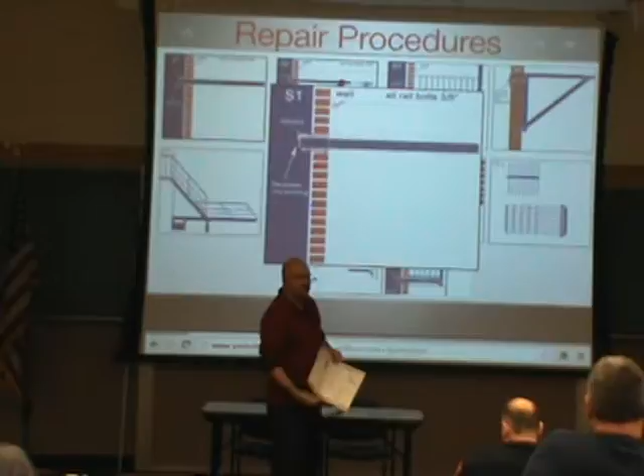every fire escape has been built this way. We're gonna end up on cantilevers and ladders. When you start looking on the inside, this is how every fire escape has been built for 100+ years. None of them are built any different than this, okay? So let's take a look at this. All steel that goes into a building only goes in 8 to 12 inches deep, guys, that's it. It doesn't go 2 feet deep in your building, 8 to 12 inches deep.

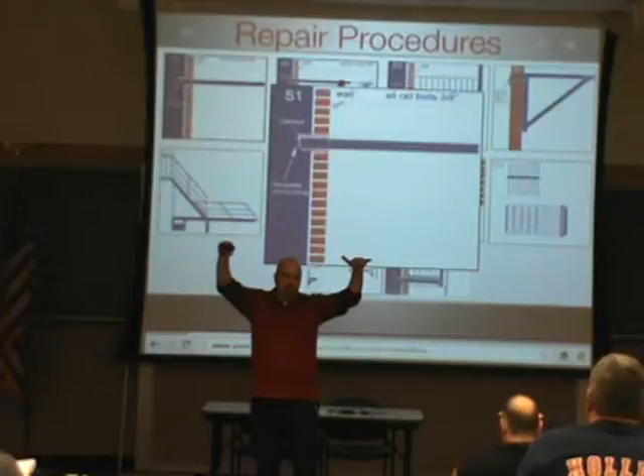So if you put a lot of pressure on this that doesn't have a brace, what's gonna happen in this area? You put all the pressure there, right? It's simple physics, it'll blow out that cement, right? So when you lose a bracket or you lose a leg to the ground, what happens to that structure that's still up in the air? You load it incorrectly, that's when it falls. Otherwise, it'll support itself. But you put people and elephants on there, what happens? Okay? So this is how every fire escape support starts. They opened a hole in the wall in 1910, they stuck this steel in there, and then they packed it with cement. That's it.

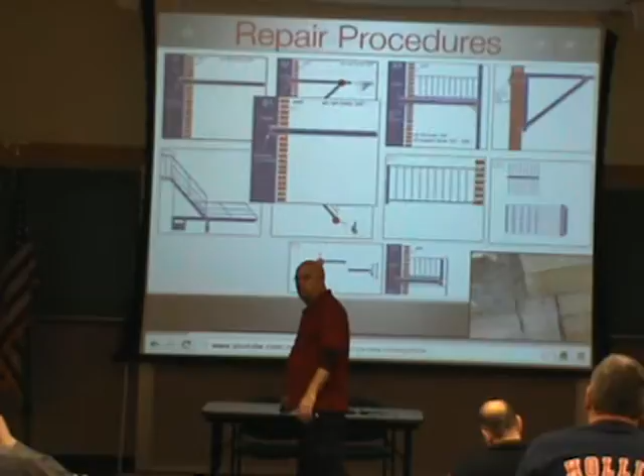That hole has to be so far in based on the size of the, 8 to 12 inches deep, that's it. No matter how size. Really? Your brick is only 3. Your wall, your typical wall on any is 2 or 3 courses of red brick, done.

A factory, yeah, the big factories you guys had out here, they're like 2 to 3 feet of wall because it was all self-supporting. Don't forget, a lot of these structures that we're talking about had steel girders, that was the makeup. So basically the steel held up the building. The dirty brick on the inside and the veneer was just that. But factories, yeah, some of your mills and stuff. But it's still only buried so deep.

I think the reason I was thinking that is because, say an apartment house, you have a balcony, depending on the size of the balcony, the stringers have... No, that's a different thing. That's a self-supporting C-channel. That's not what I'm saying here. All right. All fire escapes only go into the building 8 to 12 inches deep.

You get a self-supporting balcony, you're talking about even with 2x12s or whatever, there's so much into the building and only so much sticking out, the 1/3, 2/3 rule or whatever it may be. Right. Girders and I-beams, same thing. So if it's a self-supporting C-channel that sticks out only 4 feet, you may have 3 feet into the building tied back. That's correct. But a standard fire escape built for 100 years plus only goes 8 to 12 inches deep.

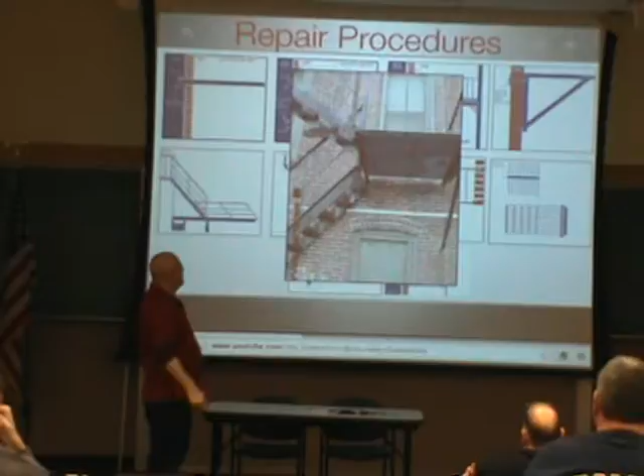So what you're looking at is what stops those singles. It's this bracket here that's gonna give it all the support. By the way, a lot of times you see across a building a lot of singles, and then just 1 or 2 brackets towards the ends. You know what's holding up all the singles in the middle? The railing is acting like a truss. The railing holds up all the singles that tie in on the ends with the brackets, and the only reason the brackets go out and tie into the rail is to hold up the grating. But the span, the truss, is the rail.

Master's degree in reverse stupidity.

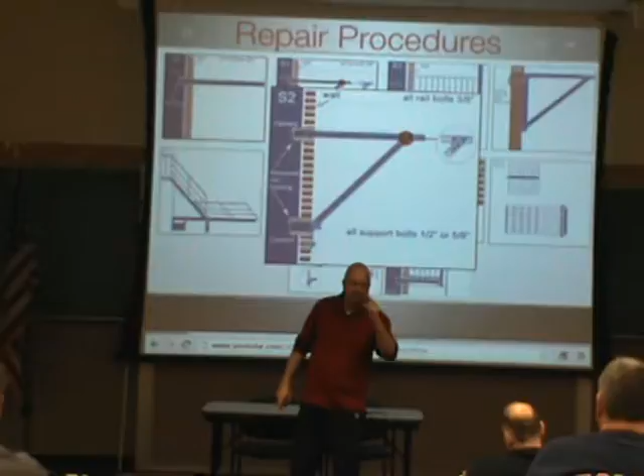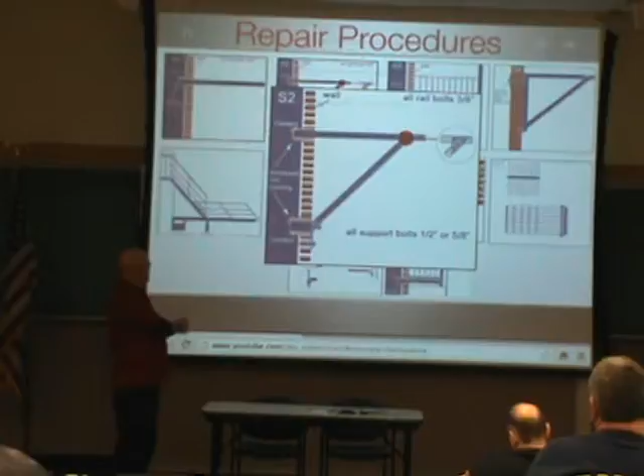Been there, done that. So a lot of the stuff you'll learn after a while, and this is coast to coast, guys. There's been no changes in fire escape building coast to coast. A lot of these brackets have a single bolt or a gusset, and they always tie back into the building. And this is what they do. They'll throw water in there. Ice jacking and rust jacking does what to cement? Spalls it. You gotta repack.

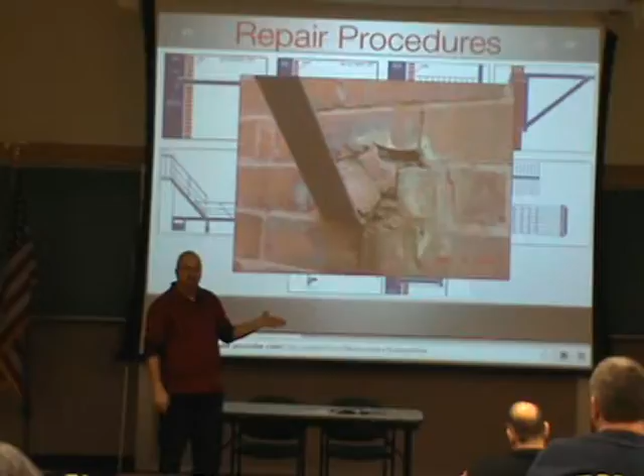Inside, the through bolts, a lot of factories will have this issue. The spacers on the inside are too small. And what do they do to the individual bricks? Pull them right through, too much pressure, so it has to be a bigger plate. Got it? It'll squish right in. Pulling through.

How do you get to fix that? You've got water, growing on a building, what's gonna happen? Moisture. Ferns, moss. Brick's porous. So a lot of times, what you see from above is not what's really happening from down below. You keep feeding it water. This is 1 inch of rust, 3/4 to 1 inch of rust on a library in Boston.

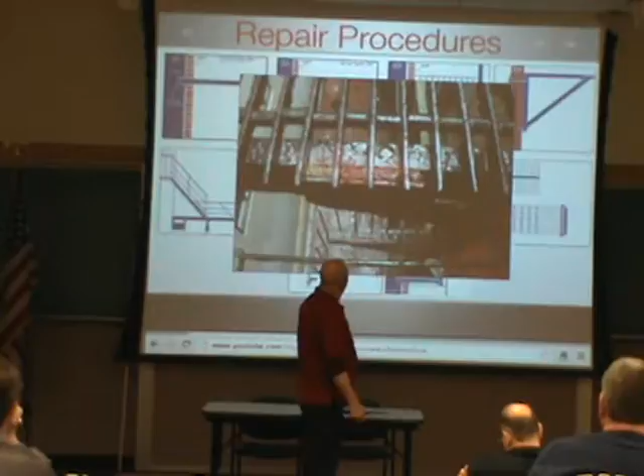So for those of you that are still growing some of the exotic ferns that are now being legalized in America, fire escapes. Okay? Can do it.

So there's another way to get a fire escape. So every now and then we have a bad situation and you're not comfortable with the brackets in the wall, put a leg on it. There's another way, where all the legs to the ground sit on a Sonotube, 3 to 4 feet below the frost line. Okay? So that's the only other way. If you don't do a bracket to the wall, you have to do a leg to the ground.

Sometimes you'll have a situation on a fire escape that's bad, that's bracketed, and you don't trust the wall. As soon as you put a leg to the ground, you've eliminated the concern in the wall. Got it? Because now my building's a leg, my leg is a leg, and I don't need the bracket anymore. Got it?

Barbed wire? Okay, so there's various violations that you're breaking when you start putting barbed wire in certain areas. So just be aware that on fire escapes, because of break-in issues, people started getting creative: broken glass, razor blades, barbed wire, nails in the studs, spring-loaded backwards, all the illegal things. There's ways to keep people off your fire escape.

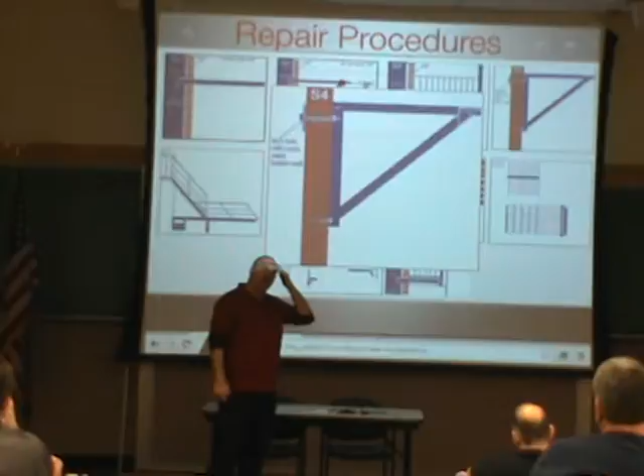Trucks smashing into your building, a lot of times they'll blow out the veneer, but where's the real damage? Inside. Inside on the masonry, right? Because is the fire escape tied into the veneer or does it just go through the veneer? Through. Goes through the veneer. This is a wood structure, guys. All wood structures in the United States must have a through bolt. So 100% of all wood structures have a through bolt.

95% of all the fire escapes in the US have a pocketed cement, but 5% of the fire escapes in masonry buildings do have a through bolt. But it's primarily factories, mills. They'll have the plate on the inside. Through bolting a fire escape also? All wood structures, if you guys are gonna get into this, am I building a wood structure? So all wood fire escapes have a leg to the ground, there's no need for through bolts.

But what I recommend highly to anybody who's gonna allow somebody, for a reduced cost, to put up a wooden fire escape that's 2 inches thick in all directions, your treads, your sides, built to 100 pounds per square foot, is have the carpenter, through an ironworker, build the brackets out of steel and then add wood to it. So the main two supports for your starting platform should be a metal frame through bolted into the building, and he frames his whole deck, rails, stairs going down to meet his 100 pounds per square foot.

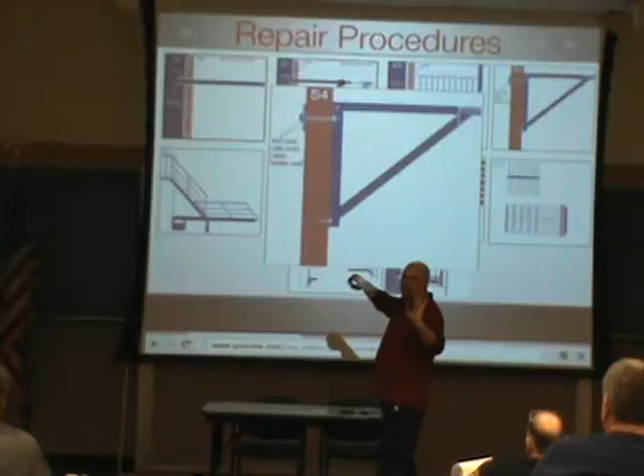Otherwise, if I can't get back in here and put that in, because now they got all finished work inside and there's no way to get to it anymore, as soon as I put a leg on this to the ground, what happens? Do I need that anymore? No. Because the building is a leg, the leg is a leg, and what do I have? A bridge. Got it?

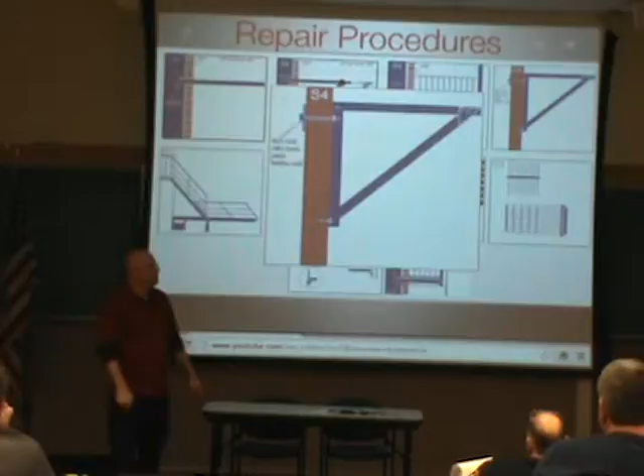That one. How do I fix that? That one there, pull it back through? Yeah, you're gonna have to put a bigger plate. Wasn't there a window up there or something? Yeah, it's a factory. So you basically put a new through bolt and you put a plate capturing more. The load is too concentrated, it's ripping right through, it's crushing the brick, because the cast iron donut is too small.

So a lot of times the plate on the inside is a 4x8 plate, picking up a stud. Or sometimes underneath the window, they'll pick up the king stud and the other king stud, and there'll be a piece all the way across, and then you kind of bury it in there. A lot of times, in between the 2x4s at 16 on center, you do all the blocking in there, and then you put the plate on the blocking.

So can you give us a rule of thumb, thickness of the steel and size of the plate that would work? Yeah, rule of thumb, again, you gotta pick up one stud for this side, you gotta pick up one stud on that side, and you're gonna pick all the studs up accordingly. And usually they wanna go with 1/2 inch thick plate, 4x8 plate. Sometimes you can do an 8x8 plate, because don't forget, what are you picking up?

So some guys mistakenly put it in between the 2x4s, and all they're doing is putting pressure against the 3/4 wood on the outside. It's supposed to pick up a stud, so that's why every now and then, between the 2x4s, 16 on center, you basically double up 2x10s in there, toenail it this way, then you through bolt through here and you put the plate inside here. So now you gotta rip out 2x4s, but you pick up the king on this side of the window, and the king on the other side of the window, both individually.

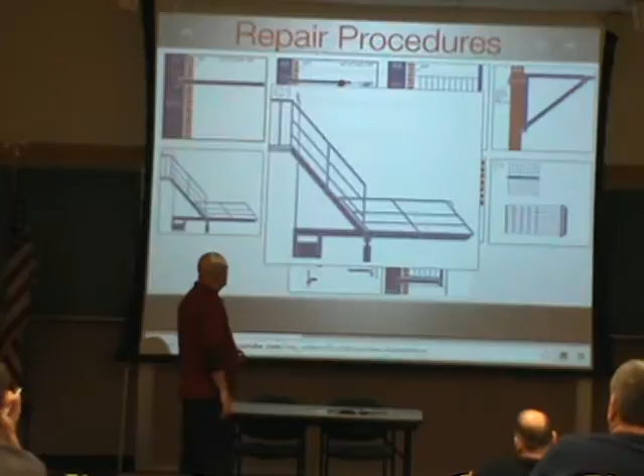Cantilevers. We're gonna talk about another life safety issue: cantilevers with a chain. And we're gonna show you why. If you have a cantilever in your city with a chain on it, it's a life safety issue. Okay? So, here's how they're supposed to be built. Single action requiring no special knowledge. Got it? So, I'm a 150-pound woman coming here with a 50-pound child. This is scenario number one. I get to this bar that's called a release bar, and it's blocking my way. So whether I know what to do or not, I run through it, and what happens?

It rotates, right? As it rotates coming down here, there's a little 6-inch piece that's holding my cantilever that wants to go up. So as soon as it rotates away, what's it let the cantilever do? Lets it drop 2 to 3 feet per second, hit the ground, and stay down. So, single action requiring no special knowledge. I go through that, it rotates here, releasing this. This cantilever, which is 2/3, 1/3, right there on the nose, it weighs 25 pounds more.

So not only does it come down 2 to 3 feet per second, if I want to throw it back up, how easy is it for me? It's perfectly balanced, it only weighs 25 pounds, so I can grab the nose. Somebody up above can grab the arm. When I throw it up, it goes up, and what does somebody upstairs do? Resets it. Got it? It's ready for the next emergency years later. That's how it works.

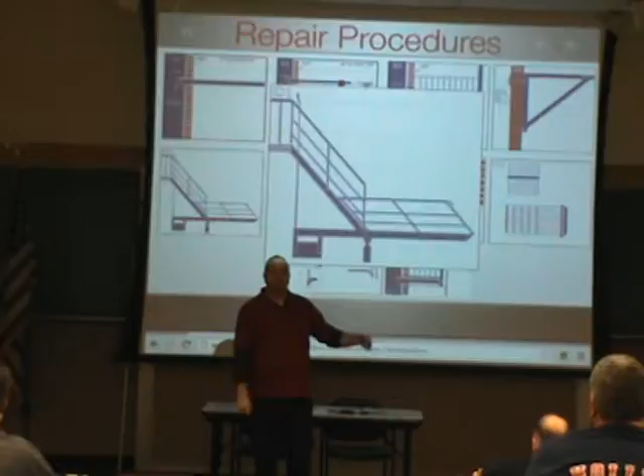So now she comes down, 150 pounds, 50-pound child behind her, and she starts going out 2 or 3 steps. What happens? Nothing. It's weighted backwards. Right. She goes 3 to 5 steps. What happens? Nothing. But she goes out 5 to 8 steps. What happens? Goes down. 150 pounds is more than enough to start the process. 2 to 3 feet per second or 5 to 10 feet per second? 5 to 10. This thing comes down, slams on the ground, she's bouncing.

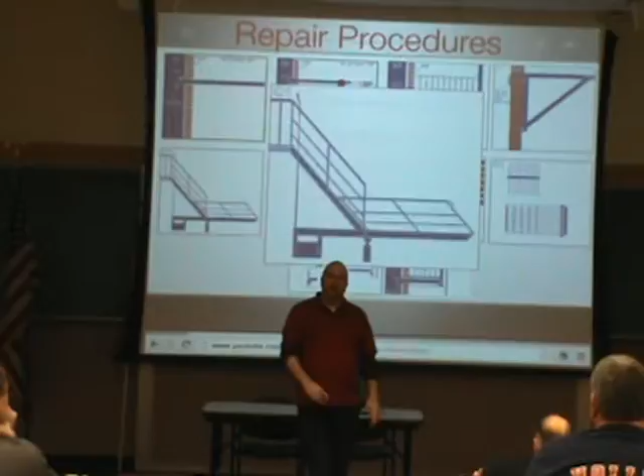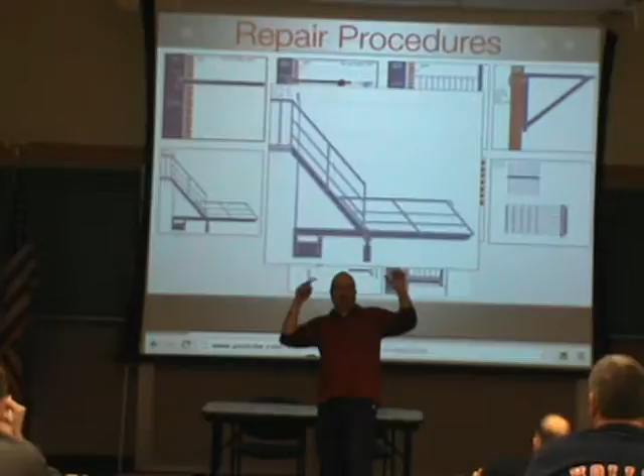And she is possibly gonna go that way, but because the thing is falling, what's your tendency? Lean forward or kick back? When she kicks back, knocks her daughter down, this thing slams the ground, she screams, her daughter cries. And now where's it gonna stay? It's gonna stay on the ground, because she's 8 steps down. She tells her daughter to stop crying, and both of them are in their PJs, right? And she goes further down, daughter in tow, she steps 150 pounds off the cantilever, and what happens? The kid goes up. Her daughter goes up now.

Her daughter's now up 12 to 14 feet in the air because cantilevers are 12 to 14 feet for what reason? Security. Trucks, garbage trucks, right? In alleyways, that's why they're 12 to 14, so that trucks don't smash into them. They have to be that high. So kids can't get up there. She's down, the daughter's up there, and she tells the daughter to do what? Jump. And the daughter does what? Doesn't jump.

So she runs back down the alleyway to go in the front of the building in her PJs, and she forgets what? Keys. So she tries to grab something to smash the window to get back in and go back into a burning building, right? You guys show up then, right? Say, what are you doing, crazy lady out here in your PJs? She goes, oh, my daughter. So you guys run down the alleyway and tell the daughter to do what? Jump. The daughter says what? No.

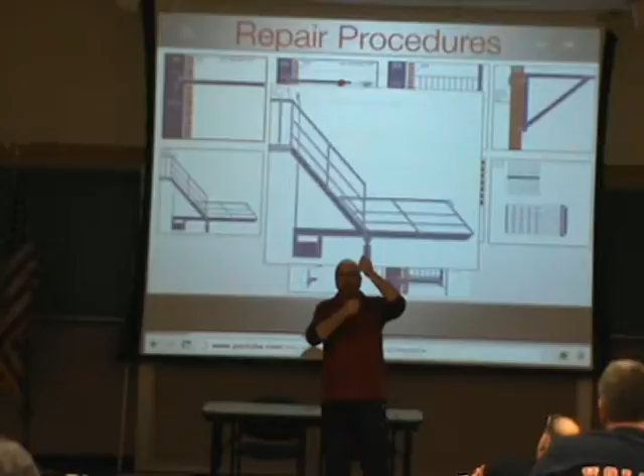So you guys run back to your fire truck and go get the pike pole, right? Go up there and grab it, pull it down, put your foot on it, reunite mom and the daughter, right? And they get away. What do you do with your foot? Take it off. If you do that, what happens? It goes up in the air. So what do you do? You just lost one guy to hold the thing down. Is that how it's supposed to be? Is that single action requiring no special knowledge? So every fire escape cantilever with a chain has been modified by the owner to avoid a violation, balanced backwards, and is it a life safety issue? Yes.

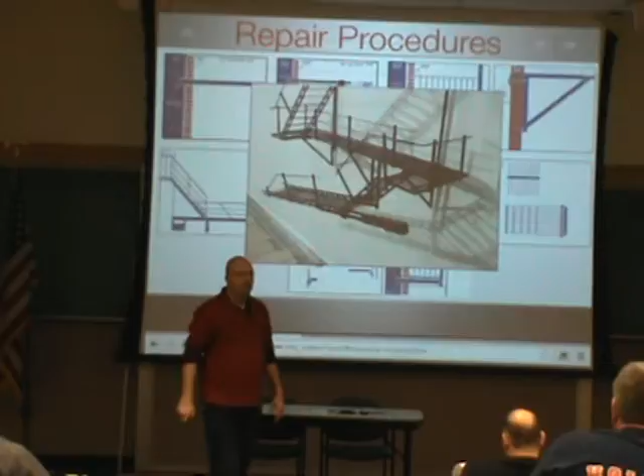So some of these with no release arms can get quickly out of balance when you get a lot of snow like you guys just got now. When pigeons land, can you get over 25 pounds of pigeons on one end to bring it down? Yeah. So that's why people put in these release arms to keep them perfectly horizontal. Or they started putting weights on the back and the chain to basically always hold it horizontal. Snow, ice, pigeons.

So now, here's what it looks like. Is that chain correctly put in a place that it should be? And can that bracket handle the load of the impact when this thing comes down? No. That release arm is fully open. Is this thing doing anything? That's no good. Is this a life safety issue? Yes.

So trash trucks, people smashing into these things. As soon as you see a thing that just doesn't look right, that is messed up, right? Life safety issue. Trash trucks. See the chain right there? So not only did it smash, it still has a chain on it. So as soon as you lose a cantilever for any reason, can people self-evacuate? No. So they're trapped on the upper floors.

And when you show up to fight the fire, is it a firefight or a rescue mission? Rescue. So is that what you want to be doing? So is this a life safety issue? Minutes count, people are dead. Moving trucks, trash trucks, they do this all the time. What's the immediate answer to make this functional that night so that all 50 people can go back into the building? Scaffolding back here somewhere?

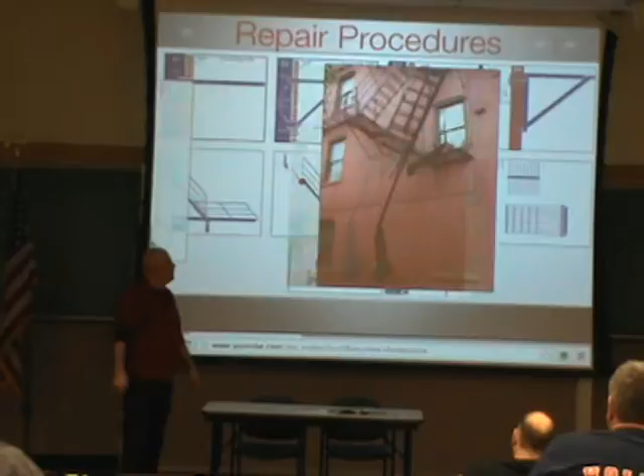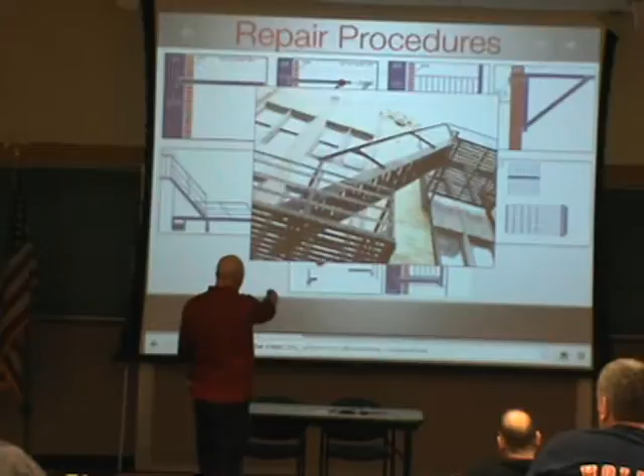Holiday Inn. Staircases. So not only your treads are problems; if the fire escape is not properly attached at the top or properly attached at the bottom, you can lose a whole staircase, not just a tread. So if the stringer at the very top is full of rust, you're losing the tread or you're losing the staircase? Staircase. This is a hotel, a 24-story hotel in Chicago, 8 stories up, with a zoom lens. I took this photo.

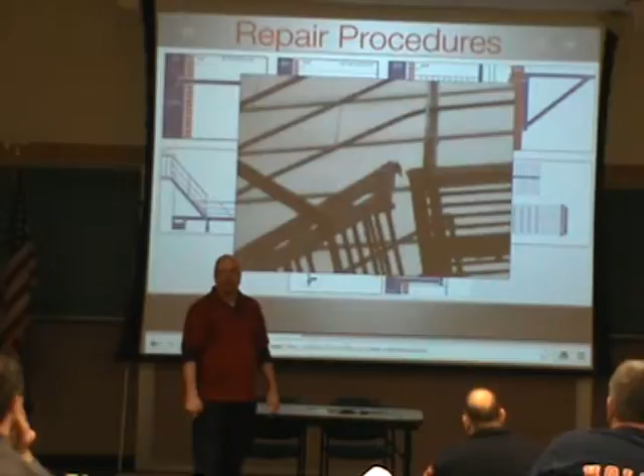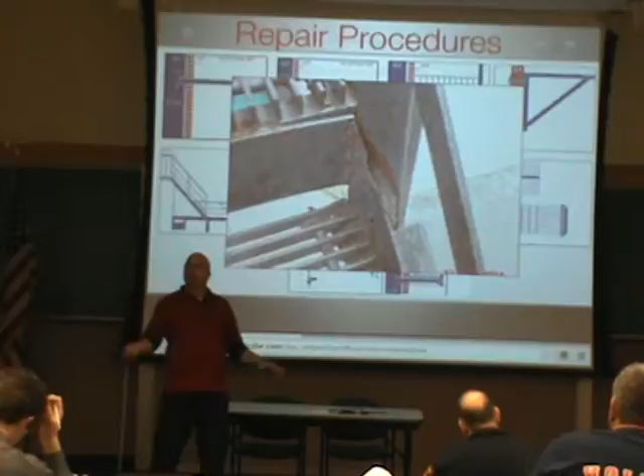Wow, that's bad. How long has that rust been growing? Look how much rust is here. Look how much rust is there. A lot of this is because of leaves and trees throwing additional accumulation, organic material in that area, and it just accelerates the rust. Okay? These things, when these treads start falling by themselves, look how much was eaten before snow dropped these treads. When treads look like this, snow actually made these things fall.

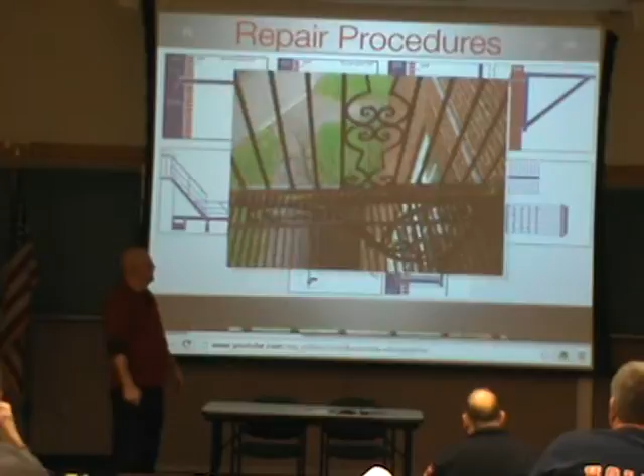Railings, all welded railings, guys. All gonna need a bolt. Every welded connection needs an x-ray or load test, mandatory. Or pop a bolt, no load test needed. So rust, whenever you got a sandwich of anything, guys, it'll always accumulate rust unless you clean it, prime it, silicone it.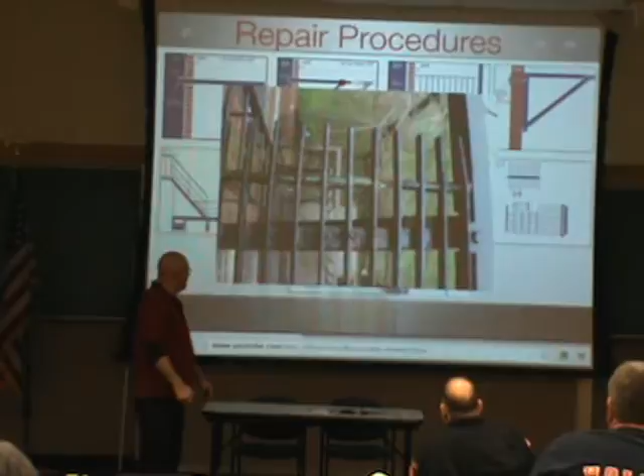Did anybody use silicone 50 to 75 years ago? No. Today, every connection that gets repaired must have silicone in it. And a lot of your codes state that. It says you must put in some preventive product in the connection to prevent future corrosion. Okay? In Chicago, you know how often they want you to paint your fire escape? By law, every 3 years.

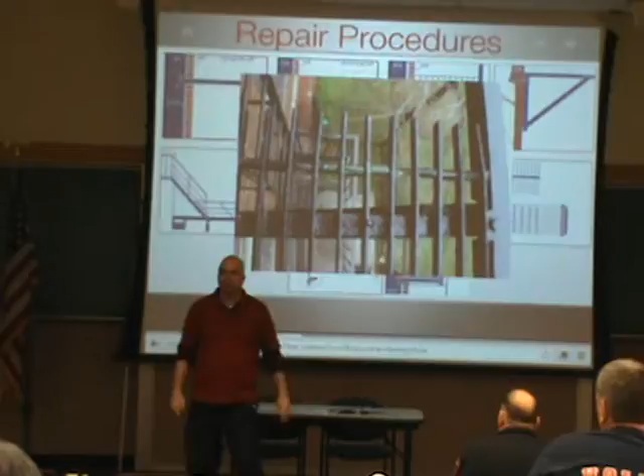In a lot of New England, we use the slats on end like that. And the way you keep the spacing every 1 inch is with these little spacers that had a 1/4 inch rod with 1 inch spacer, little tubes, and they rot from the inside out. Can I fix them? No. Can I reinforce it by putting a piece of flat underneath, a flat on top right next to this, and then mechanically create a sandwich? Yes.

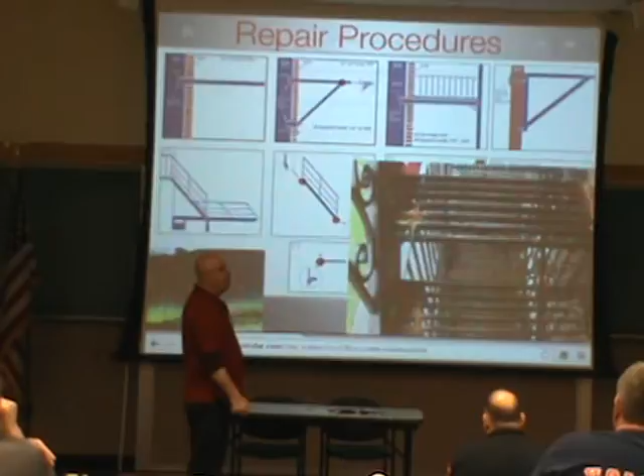So anywhere there's a sandwich, there's rust. So you got to clean it and you got to fill it. Because all those cracks and crannies from ice jacking and rust jacking, when you put it all back together, she won't close anymore. So what do you fill it with? Caulking. 35-year paintable, which is a latex silicone, or 50-year silicone, but it's not paintable. So you can only put it on black fire escapes, and so you got to sort of choose which one you're going to use accordingly.

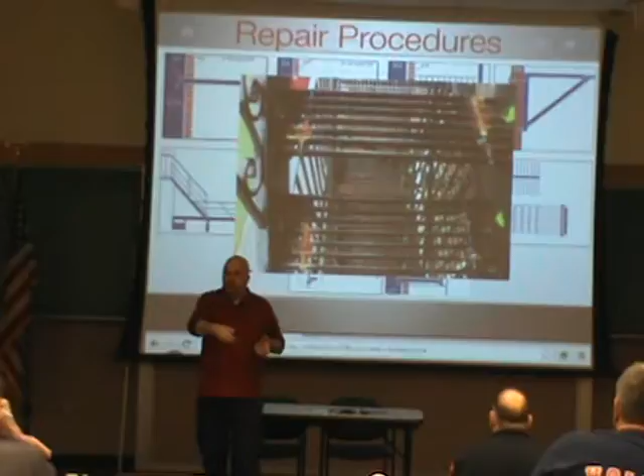See the treads? If I don't get these spacers, see this one piece of flat here on the nose? That's the one that's going to give way and make you trip going down the stairs or going up the stairs. But as soon as I put that reinforcement that basically grabs the tail, grabs the nose, and creates a mechanical sandwich, we can use these treads for another 20 years, okay? Treads.

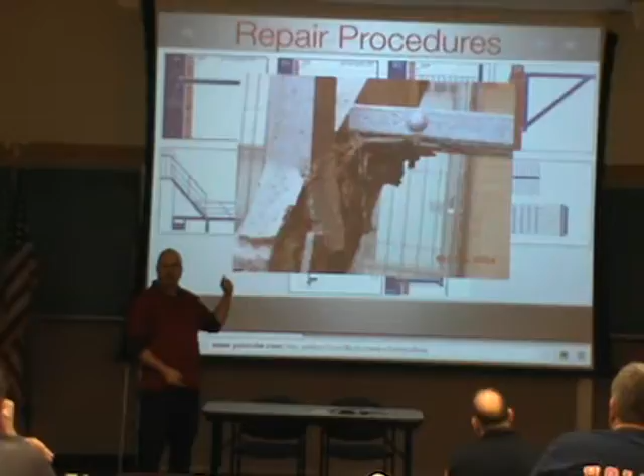Sea salt. This is a school by the ocean. You let it go, 25 years. If somebody didn't see this today, they didn't see it for 25 years. 1 inch of rust? Why? A lot of times it's what side of the building it's on. Is it staying wet all the time? Is there a gutter above it feeding water to it every day?

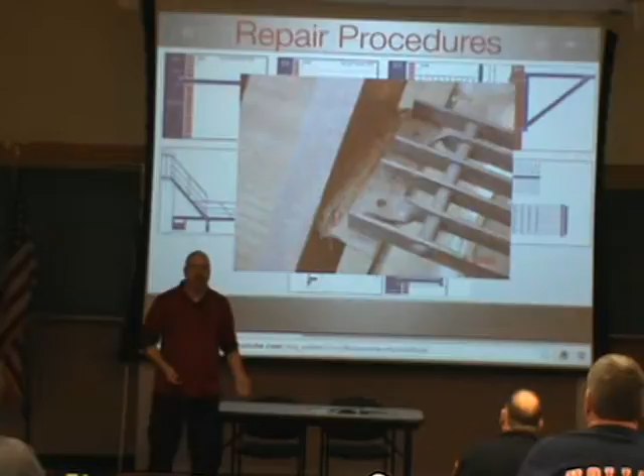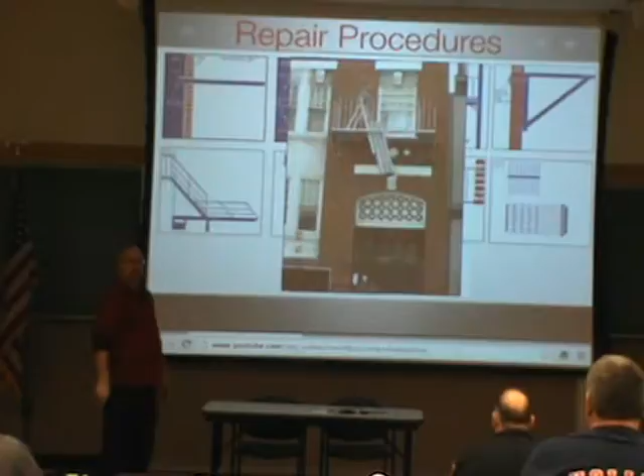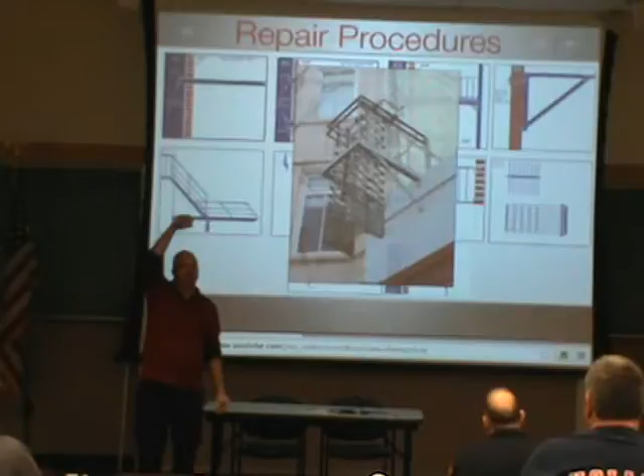Ladders. You guys got some situations that ladders were modified and they create a flop-out ladder. I don't know if you guys have ever gotten one of those. The flop-out ladders are a problem, which I'll talk about in a second. In California, they have sliding ladders. You know why we can't have these here? They'll freeze up. So in areas that are warmer, you can have these kind of ladders. It's called accordion ladders. Again, they're pre-existing non-conforming, but when you release them, they open up like an accordion, 15 to 25 feet.

Fixed ladders, right? So if I'm looking at a building in your city and it ends 7 feet from the ground, is it a violation? Yes. Yep, it's supposed to be all the way to grade. So you can put in a slider on this so that it slides the rest of the way. You can take the slider out and put a fold-out ladder that only operates from above, or you can take this ladder out and do a complete stair to the ground.

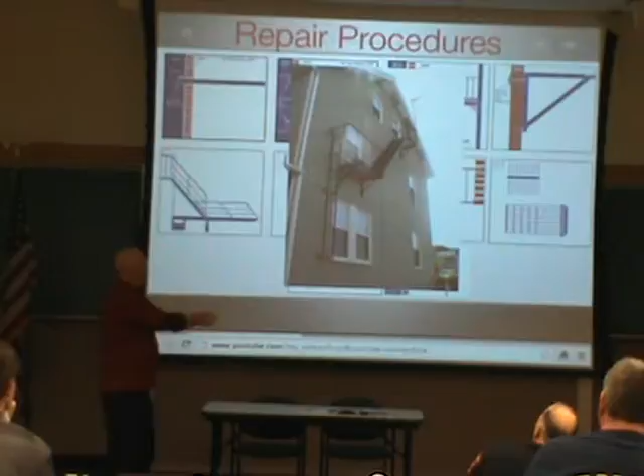What does that ladder have to be hooked with? Through bolts? No, lag screw. You can just lag screw it directly to the building. It has two there, two there, two there, and usually the spacing is even less. Even though it's a wood building? Yeah, it's just lag screwed. They're not required to be through bolted. The brackets are through bolted. Right. And because it's permanent to the ground, it's sitting on the ground, so. Right.

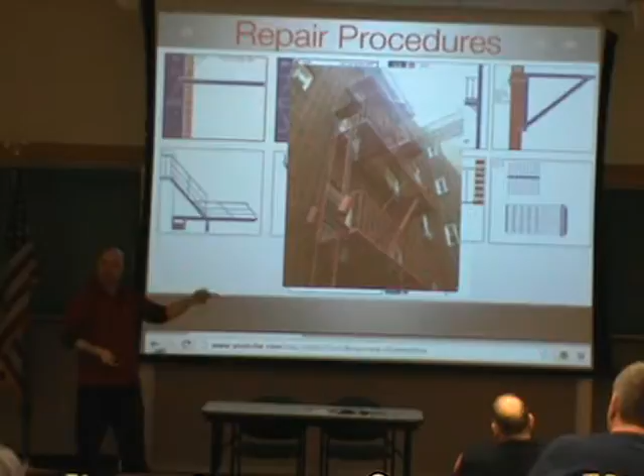So this is what a balanced one looks like, see? So everything's up, it's got pulleys, it's got cables, and a lot of times these things are on a track of some kind, so in case the cable breaks, they don't fall down to the ground and conk somebody in the head. Goosenecks. You guys got a lot of goosenecks that everybody's scared about. Well, with that 1 year walkthrough by the agent, guess who's going over the goosenecks? Landlord, agent, or other, right? It's not your rookies. You guys are going to send your rookies out there, right?

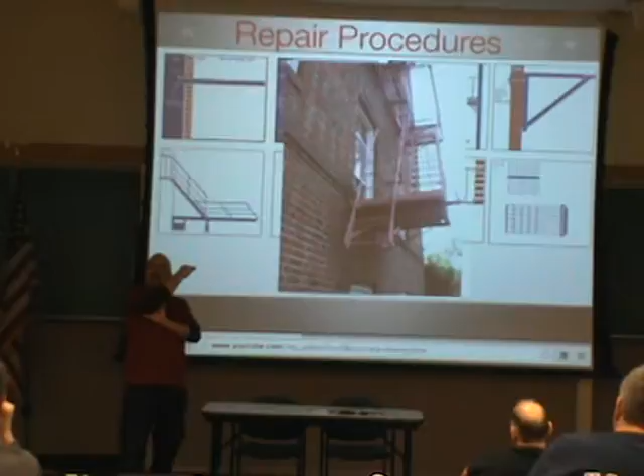These are the flop outs. These used to be single ladders fixed that ended 7 feet from the ground. People were breaking into the building, so somebody went in and chopped it and basically folded half of it back. It's illegal, it's a life safety concern, because when you release it or the wind blows it, because usually they have a chain on it, they're supposed to let it out by hand.

Is that single action requiring no special knowledge? So when this thing flops out and it comes down, it'll conk somebody on the head down below, and it'll kill or maim them. So this is what it looks like when it's down. Illegal, can't have these. So this ladder needs to be put back on the wall permanently, and if they're worried about break-ins, they can either have a fold up, a slide down, or a permanent stair with a cage around it, but they can't have this anymore.

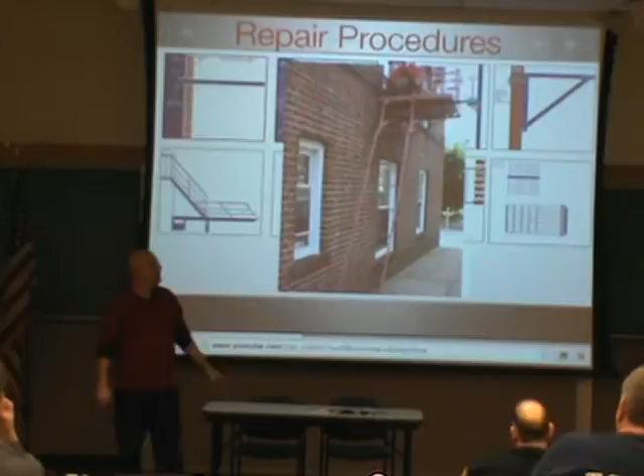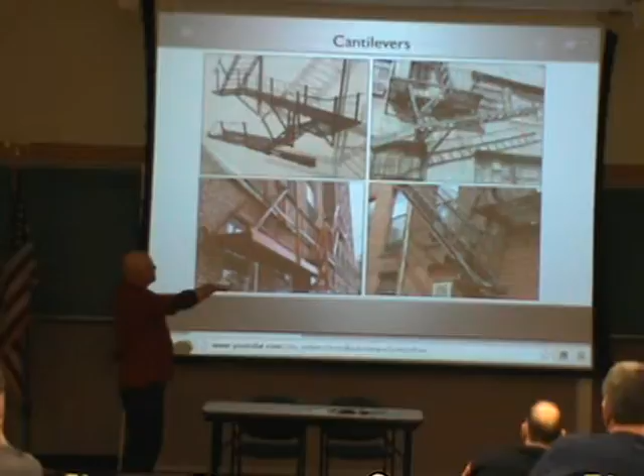Cantilevers, you see what happens when they get out of balance? Will you write a violation if you're walking down the alleyway and you see that? See what it starts to show you? So $30 and a chain. I'll remove your violation. I won't fix it right, but I'll remove your violation.

I want to show you the $1 million reason why every weld that you'll ever encounter in your state on a fire escape, you will put a bolt through it. So this is a cantilever in the city of Chicago. You see all the other activity going on? All the ropes and everything? There's a masonry company doing the whole restoration. You get that a lot in your old buildings, masonry companies? And they come in and use the fire escape?

Can they use the fire escape as a working platform if it's just been recently certified? Well, they can use it with permission as long as they take the fire escape offline. It's still usable, but they basically own it now while they're doing everything that they're doing. But let's show you how violent it is. 2 to 3 feet per second. Hit the ground, stay down. See all that torquing and wiggling?

Right? Well, there was a piece of steel on this thing that when we refurbished this whole fire escape system, that piece of steel was pristine, didn't have any bulge, didn't have any rust, didn't have any tears. You know what fell on some guy's head that was using this fire escape? They would do this 10 to 15 times a day for 2 to 3 months. Guess what fell off then? That piece of metal that was welded, it broke, conked the guy in the head.

Did he have his helmet on? No. So that guy sued everybody. He sued, took 7 years for this lawsuit to finally get through. Cost $1 million. Not 27, which was originally what he wanted. I'll have to explain why.

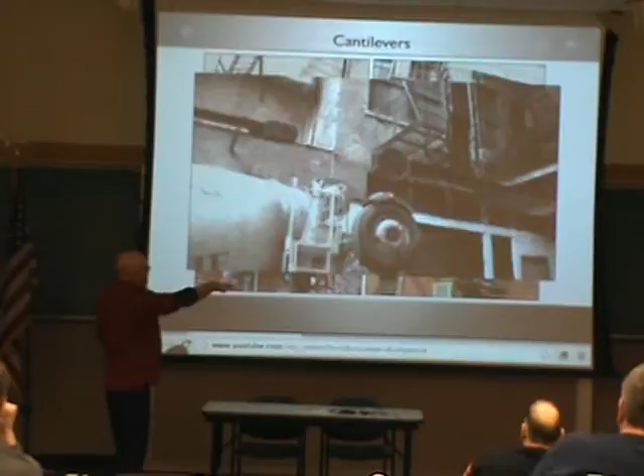While we were doing this, this cement truck showed up. So that's good, right? I can show you why things are 12 to 14 feet. But look as he goes underneath this one. Look at the chain. The hotel that had that 8-foot piece of steel coming out, you know, the staircase coming off? See that right there? See that chain? Because if it didn't have the chain and it was slightly down, what would be happening to every one of these cantilevers when these guys back up, looking in the rearview mirrors? Are they looking up or are they looking back?

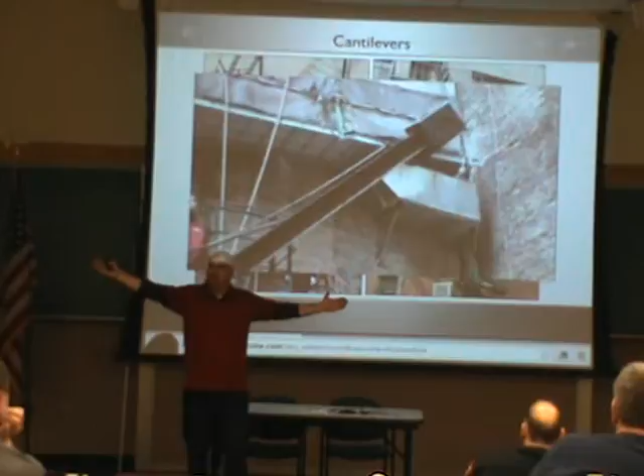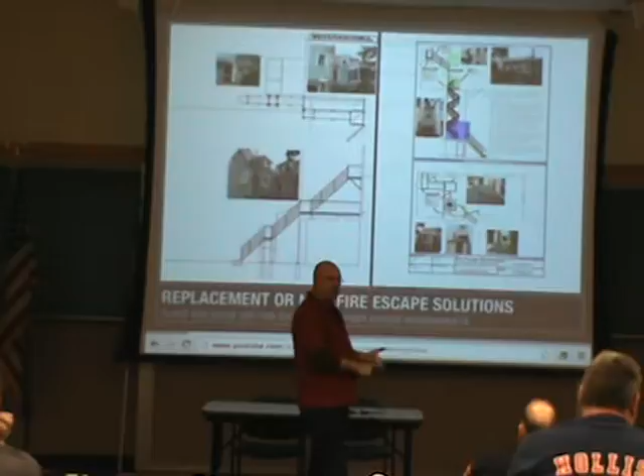So now the guy wanted $27 million. He sued everybody. He sued me, the ironworker that did all the work. He sued the guys who signed off, the architect that signed off, the management company, the owner of the building, the shoe store that rented the building, and he sued the city of Chicago. Why? Because what we signed when we were done with this was to the best of my information, knowledge, and belief.

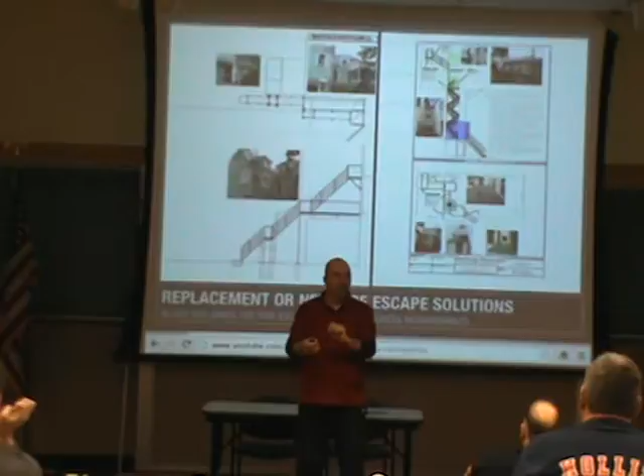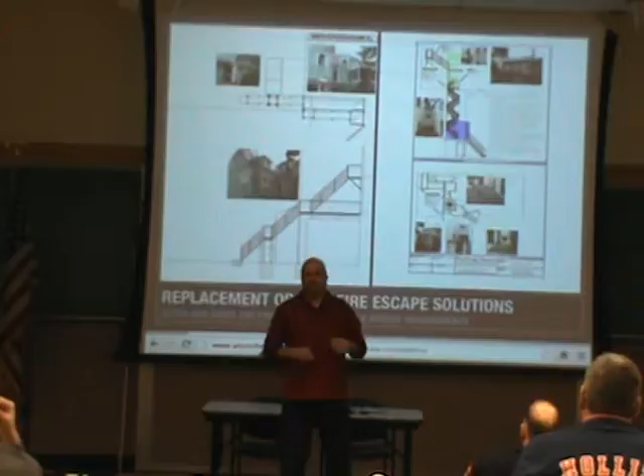Right? So here he's going, and it's almost in the 7th year, claiming that he was all broken up and he really couldn't think. And so just this past summer, they sent a private investigator to chase him, and he was in a field doing what? Playing soccer, volleyball, and all those things that you're not supposed to be doing. So, instead of 27 million, he got only 1 million. I asked my lawyer, why you still give him $1 million? He goes, because he still got conked in the head.

So, the point of that is everybody's going to be back. Philadelphia, the city going to get involved in this lawsuit? Colorado Springs, city involved? So, you accept an opinion letter, you're also accepting what? Liability. Because who's smarter than you as a city? Isn't it that design professional who wrote you a letter that says, here's an opinion and to the best of my information, knowledge, and belief, and you say, I'll take that. What did you just assume? You just assume the liability for it.

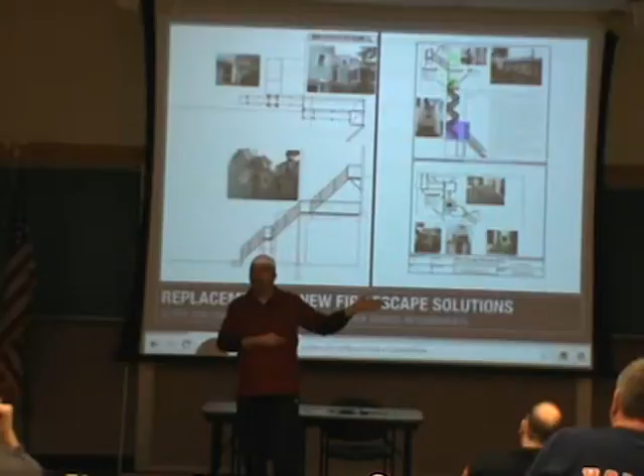Got it? So, but the code, NFPA says, I'll accept by load test. Any liability with a load test? None, because you did what the code said, right? It was load tested, any liability for you, the owner, or the design professional, after it passes a load test? Or there's the or, other satisfactory evidence of strength, but will you accept an opinion letter? Wouldn't look at it. With an attached what?

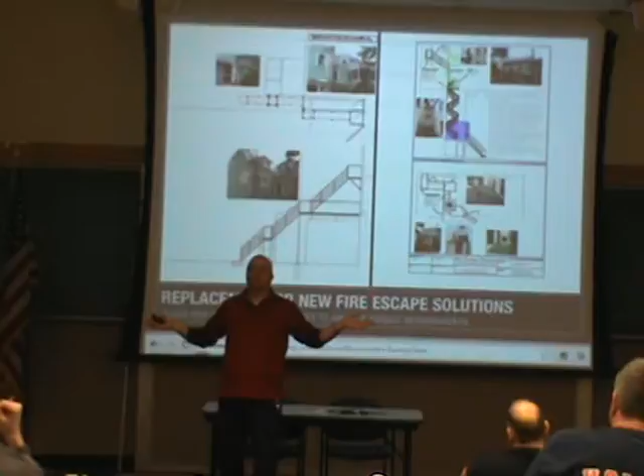So if you accept an opinion letter, what do you also want with that? Load test. Or what's the other version of other satisfactory evidence of strength? Full refurb with tiebacks into the building verified, what do you get there? And if something catastrophic does happen 2 to 3 years from now, and a bolt sheared, who's everybody suing? The bolt company. It was a product defect. Got it? It's all about shifting liability.

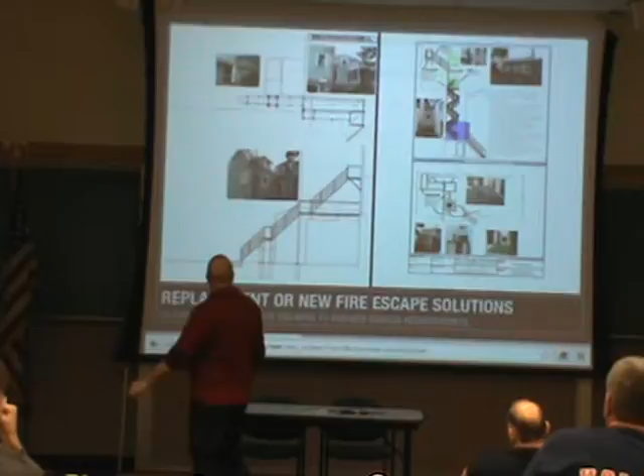So, is there answers for all your mansions and all your buildings? That could be staircases, that could be spirals, this is a YMCA. The only space I had to stick this thing in was right there. That's what we did. Okay? A spiral. So can spirals be the answer? Can ladders still be an answer? When you've exhausted all means of putting in a traditional stair, spirals kick in and ladders start creeping back in as possibilities whenever there's a lack of space. Got it?

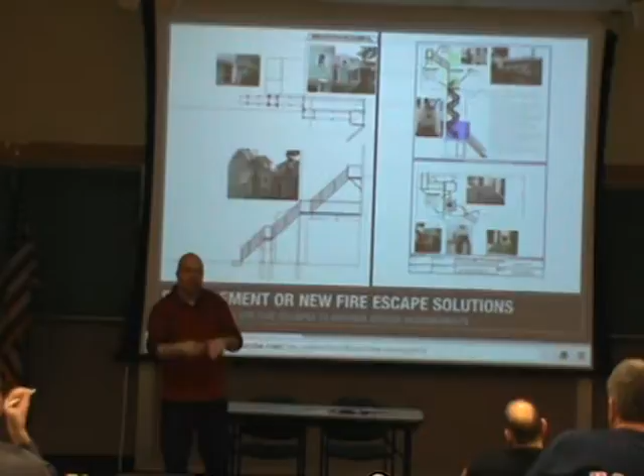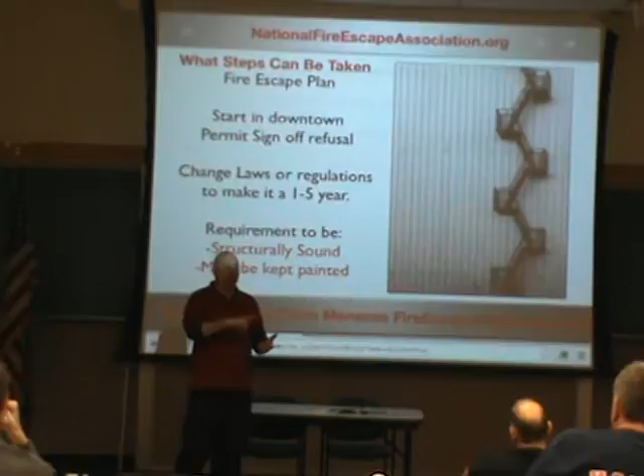So where are we going to start this? This is a 5-year program, guys. You don't think you're going to walk out of here and start this overnight, but you're going to get the ball rolling. And with the ball rolling, it usually takes 3 to 5 years to get something going. So as we start working with you and work with industry standard documentation, start getting all the partnerships back together so that the health, the housing, the building, the fire, and anybody else associated with all these structures all have automatic triggers or checklist items, what's going to happen? It'll take 3 to 5 years, you'll get this under control.

Through your local ordinance, you force the 5-year rule. Through the local ordinance, you make sure all your fire escapes get tagged. You continue doing training. So not only do we do this training today, a year or 2 from now, we do additional training, but now we start inviting vendors and engineers into this class who are doing stuff in your city, but still not getting it, you know what I'm saying? So you bring them in. So we did that with Portland, Oregon. We had 150 people in the class.

And it had fire officials, building officials, design professionals, and vendors, and painters who were in the class. And there was nothing better than everybody like, well, I'm only doing this. And like, well, then you're going to accept that? And so it became one of these rules that, as people said, this is what I'm going to do, I just said, well, will you accept that? And what will you guys want? Because there was a lot of like, hey, I don't want to carry all the burden here. So that class got recorded and it's online. So we have our class here. Believe me, the vendors and the engineers need to be pulled into a future class in about 2 to 3 years.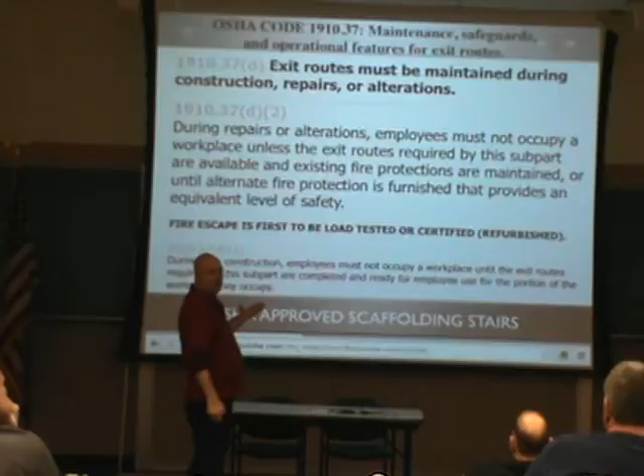Okay? This is what's called the downtown walk-around. We don't have to go to the code, do we? We already know the code, right? How many people are you partnered up with now? Bunch. Right? Who else do you have on your side? Right? OSHA. Confidence test. There's confidence tests everywhere now.

So if somebody tells you, is this a state document that you're making me sign? What do you say to them? This is an industry standard confidence test that has standard questions, both related to the general structure and to the physical structural components. All right, so all of them are questionnaires, yes, no, no opinions. There's the yearly.

This is all Boston wants from me. To the best of my information, knowledge, I believe the fire escape is in conformity with the Mass Building Code. So do you think this, just because I come from Boston, it's working? But you go outside of Boston, they're following these rules. But sometimes what happens with the king in his castle? They're the last to conform, but that's okay. I've gotten more done from a grassroots level than I've done from a state level.

So, confidence tests, we'll send you these, or you can go online. If you go to National Fire Escape Association, you go on the documents, you can actually download the PDFs directly there. Checklist. Here's that tax letter. City of Lowell, they send out with the tax letter, say, hi, City of Lowell, we're concerned about your safety. If you own a structure in my city that has a fire escape, there's a law associated with it, I need a certificate within the next 30 days.

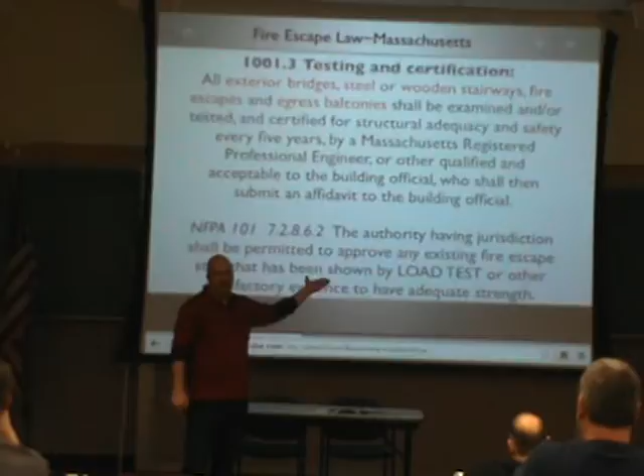This is you. This is every city in Massachusetts. Doesn't have to be Philly. Philly is representing you right now. That's all. Tell that to your mayor. Say, hey, we have a bunch of these hand grenades now as we speak.

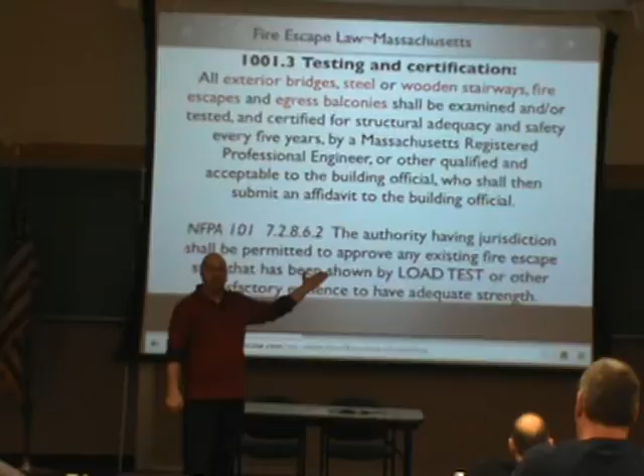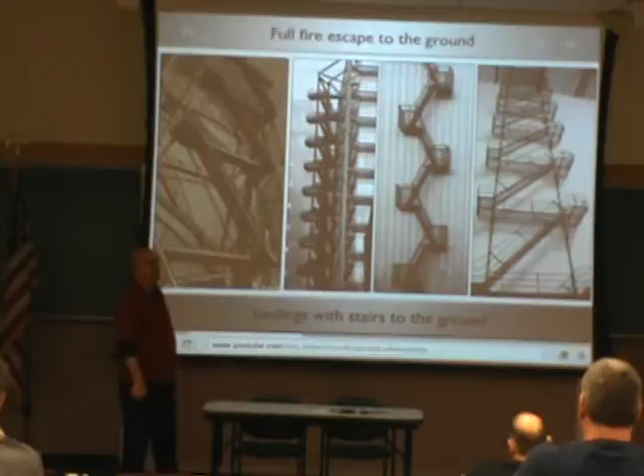Ready? All exterior steel or wooden stairs. Is this an exterior steel or wooden stair? Well, I'm just saying, does it fit into the category of an exterior steel or wooden stair? Exterior steel or wooden stairs, right? Exterior steel or wooden stairs, because we now are going to start getting into some farm machinery, we're going to start getting into some oil refineries, you're going to get into some signage.

How about these egress balconies? Are these exterior steel wooden stairs, bridges, exposed to the weather? Do they need to be examined and load tested? Hotels sometimes have these external walkways that go back into the room that end in a stair. Is that an exterior steel wooden stair in all these motels? Ramadas, Pine Inn, local something, whatever. How do you get in every single one of those? Through a long catwalk with a stair on either side.

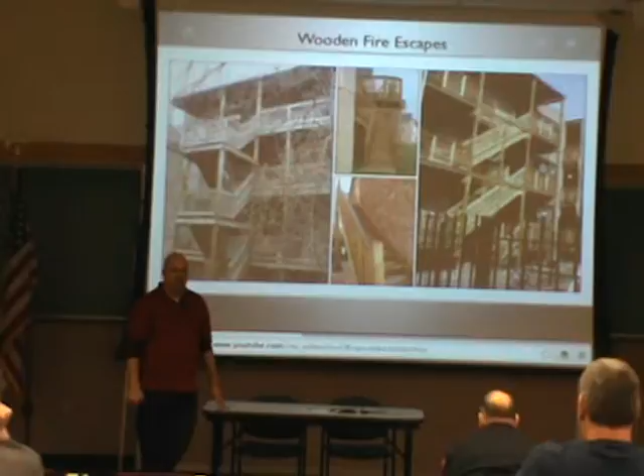These egress balconies. So you guys, how about these porches on the back of buildings that have the stairs inside the porch? Is this a second means of egress? Is this a fire escape? Or both? Is it an exterior steel wooden stair? Somebody asked me, how many feet off the ground before you start calling it an exterior steel wooden stair? Well, can you hurt yourself on 5 feet? Yes. So all exterior steel or wooden stairs.

Spirals, decks. So this is one of those. Let's say that was an apartment complex, and that is my apartment complex. Now, did I just make my deck and the staircase need to be 100 pounds per square foot? So some of these got built to 60 pounds per square foot when they actually need to be 100. Some of the decking on this is 5/4. In order to satisfy, I need to beef up the structure, and I need to add another 5/4 on top to meet the 1.5 inch nominal.

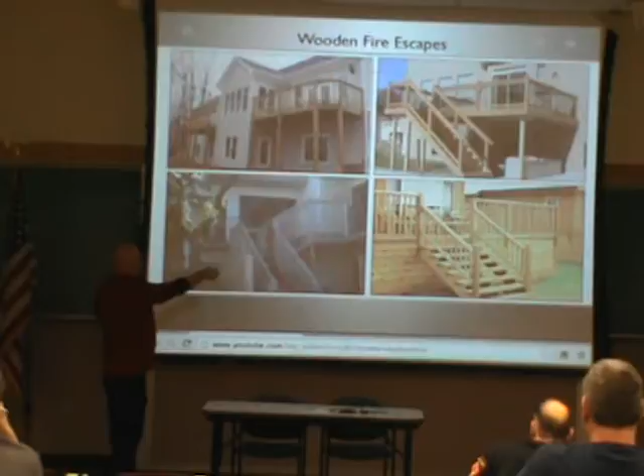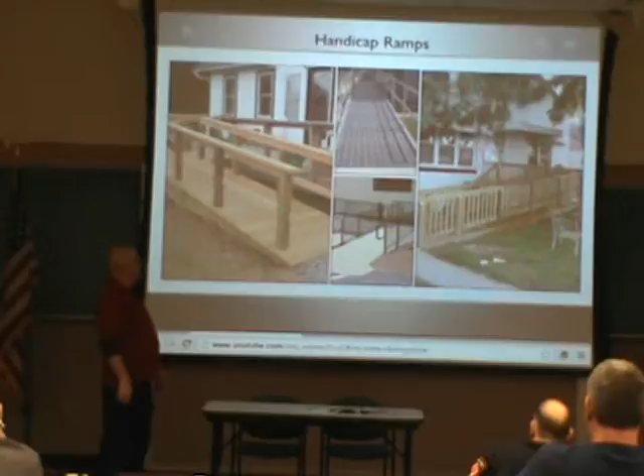So this is that wood question that came up. Can fire escapes be made out of wood? They already are. This is a typical fire escape right here. Couches and fridges go up and down, but this is only 5/4 wood, built to 60 pounds. Exterior steel or wooden stair. So on a case-by-case basis, you'll start getting this under control. Handicap ramps. It's a bridge. Must be examined.

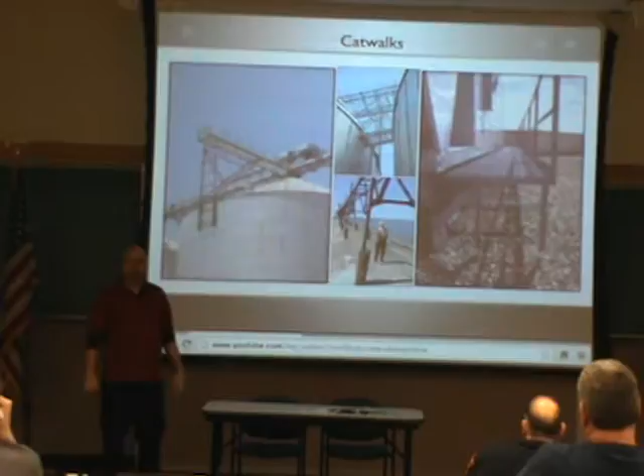Machinery, refineries. Don't you guys go up and deal with those when there's a fire? Mechanical equipment, catwalks, roof, not siding, but signage. Bridge overs. Skywalks for hotels and/or institutions. Right? How about this problem? People with a fixed ladder outside their window. Is that legal?

Somebody shoehorned that in. So that means somebody made this a 3-family home, and that's what their answer is: is that single action requiring no special knowledge? Now, you put a platform out there and you make a legal ladder to the ground, right? It's legal. But what happens if they never pulled a permit to have this? What can you order upon them? Because they never pulled a permit to make that into a 3-family, or they shoehorned this thing in, but it's been 22 years that this thing's been like this.

Can you make them put a door where the window is? Full staircase to the ground, because they never pulled a permit. Not them, somebody else who sold it to them. Or can you work with them and say, you know what, I'm going to work with you. I need a platform, and I need that ladder system all the way to grade. So that usually means a platform there, another platform here, because I can't have over 25 feet of fall for a ladder. And so you basically have a platform to another platform to another ladder to the ground, if you allow it. Otherwise, full metal stairs coming out the door to the grade, because these people pissed you off for some reason.

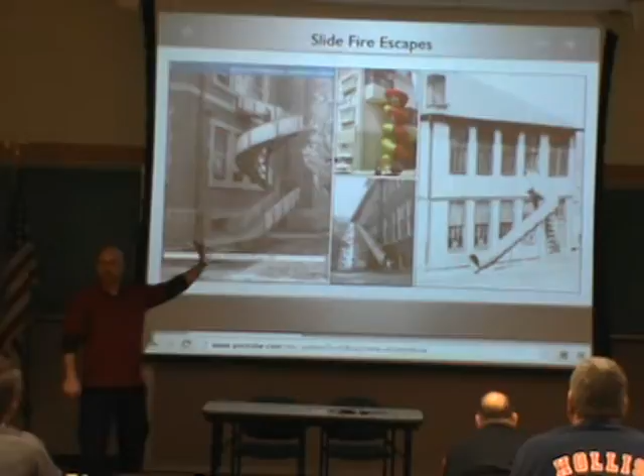But you see this? Corkscrew all the way down, 12 stories. Still in operation? Yes. Still their means of egress. And by the way, you were talking about some of the schools. This is what used to be slidescapes all over the country before they got rid of every single one of them. Wow, looks like a trash tunnel. Yep. Now you can imagine why they got rid of them, because kids were doing this every day. And that's how you got back into school. You snuck into school through the fire escape.

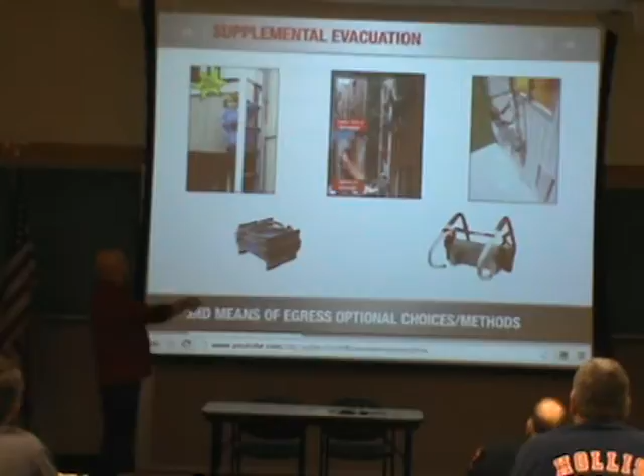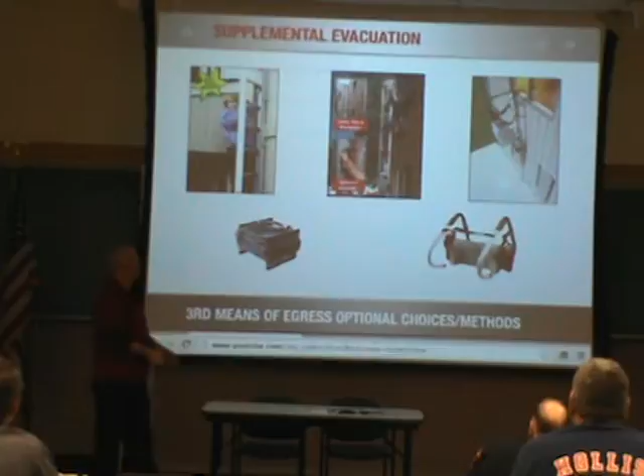Sure. This is that fold-out ladder that they sell if you want to buy one for your single-family home. When it closes, it's pivoting on both bars, and it looks like a drain pipe. But when you open it, it opens up. See, it pivots there. They also have these bag ladders, which are not legal. Bag ladders are not legal, and these ladders are not legal as a second means of egress if you buy it and install it yourself. But it can be a legal third means of egress.

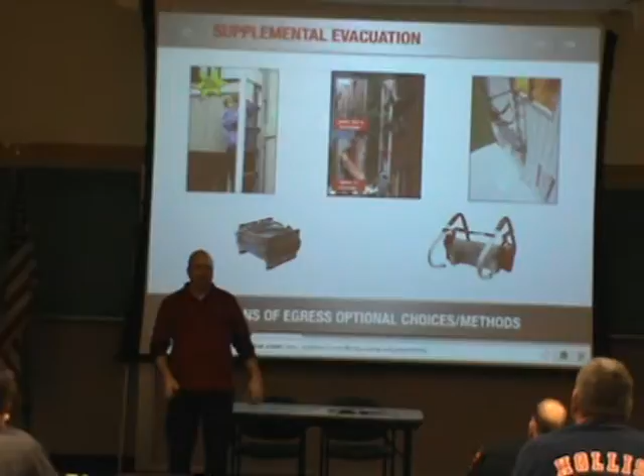Or if I get to a fire escape and it has a ladder, and I want to change that fixed ladder to one of these fold-downs, then you're legal. So you can't buy one and make it part of your situation. You can buy it yourself and install it for a third means of egress, but it won't satisfy your second means.

Guys, we've been talking about the dinosaurs, and we're almost at the end. These last two things are the end of the show. So, the standard fire escape system has always allowed people to self-evacuate. But one of the problems now is some buildings, especially taller high-rises, if people get trapped and can't come down, how do you go up and still evacuate? For $2,000 to $4,000, you can have this in your fire truck. Or they can have these as standard in high-rise buildings over 7 stories, so people can self-evacuate, or you can get to the building and help them self-evacuate. That's $2,000 to $4,000.

Then the next one right after it is $2 to $4 million, and basically it's a third means of egress, but more of an elevator system that you can add to a building that's going up brand new, or an old building downtown that wants a third means of egress. These are the two things that are now available.